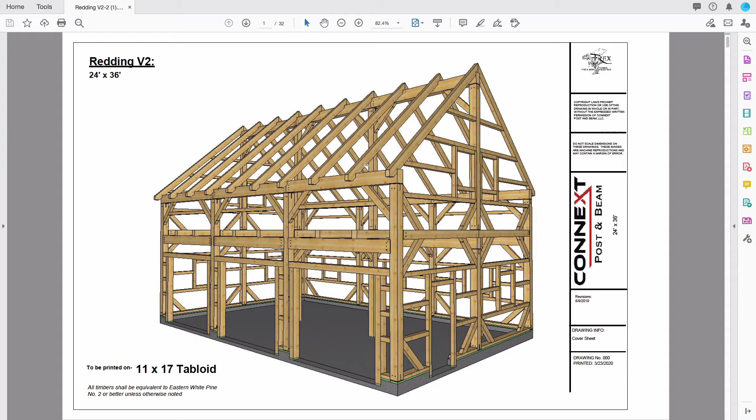Through my research, I found a company called Connex Post and Beam, owned by a guy named Pete, that I'll show you his website here in just a couple of seconds. He does what is called the T-Rex system. Let me see if I can shrink this down real quickly.

So he has designed this T-Rex system, and what you get are these T-plates. They're made out of aluminum, anodized black, and you attach these to the beams, and that takes the place of cutting the mortises and tenons. When I found this, I knew immediately that, one, I could do this, and two, this was the right way for me to go. It's going to give me the look that I want without possibly the heartache and frustration of a rookie trying to do a mortise and tenon structure and never get it done, and then just have a bunch of firewood laying on my property.

So that's essentially the way it works, right? Here are obviously some angle rafter things, some T-plates here, and so that's it. So I went ahead and I purchased this plan.

One other thing before we get into this too much, I've watched a ton of these videos over the years of people building barns, timber frame homes, post and beam, and very few times do they talk about costs. So I want to make sure that that is a part of this channel, what it costs to do this.

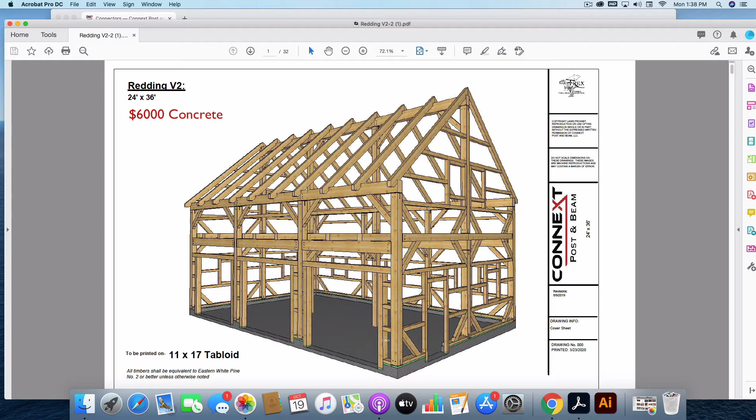Then the frame itself, which I have to cut, it's just the lumber, I purchased out of Tennessee, including the delivery to me, is a little over $10,000, and $1,700 of that is delivery, bringing a big rig to where I live at and dropping it off. From there, I'm going to have to rent something to actually pull the timbers off of the truck, because they said the packages can weigh up to 5,000 pounds, as they're strapped together. So that's that. And that does not include things like the doors, the windows, the flooring, the roof, none of that.

So that's all the connectors, the tools, that sort of thing. Then I need a $500 Stihl electric chainsaw. Yeah, I have a standard Husqvarna chainsaw, but to sit there and crank that thing over every time I needed to make a chainsaw cut is going to be a pain in the butt. So I'm just going to buy an electric chainsaw. I have a generator on the property, so that's where we're at.

So let me walk you through these plans real quick. They're very detailed. You get 32 pages of plans. I actually talked with Pete, this gentleman right here.

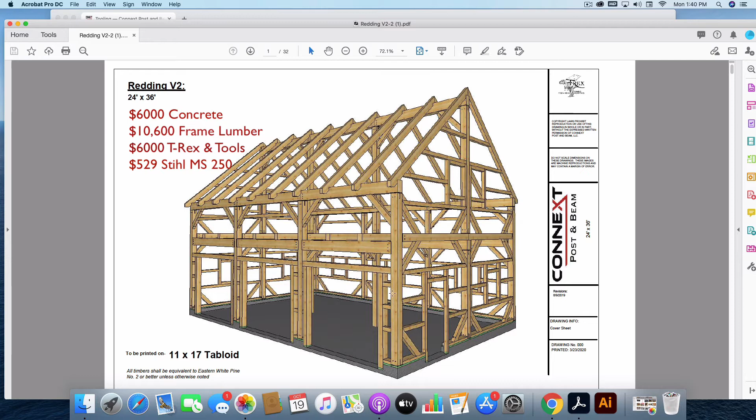The barn I was looking at was 28 by 28. This turns out to be 24 by 36. So this will give me the ability to put my boat in one side, plus a lot of area on the second floor for storage and what have you. So that's where we're at.

Again, these plans are very, very detailed, and I'm just going to scroll all the way through. That's what it looks like. And then right here, you get cut lists of all of the beams.

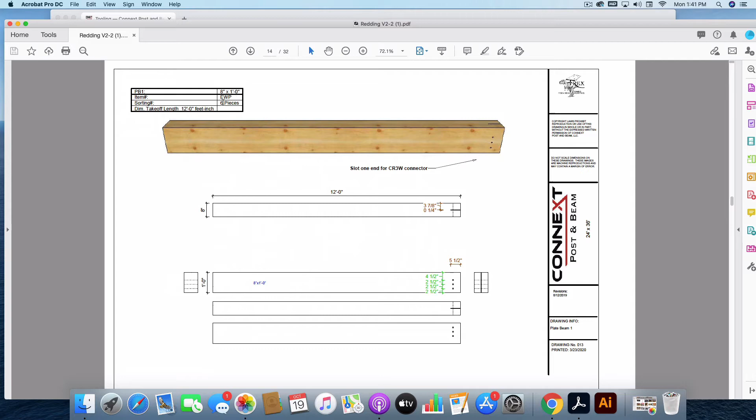So for example, I'll take this one. This is an 8 by 12, and I need 6 pieces with these identical cuts. And if I go to, let's say, the rafter here, same thing. So these are 4 by 8s. I need 20 of them. And here are all of the cuts.

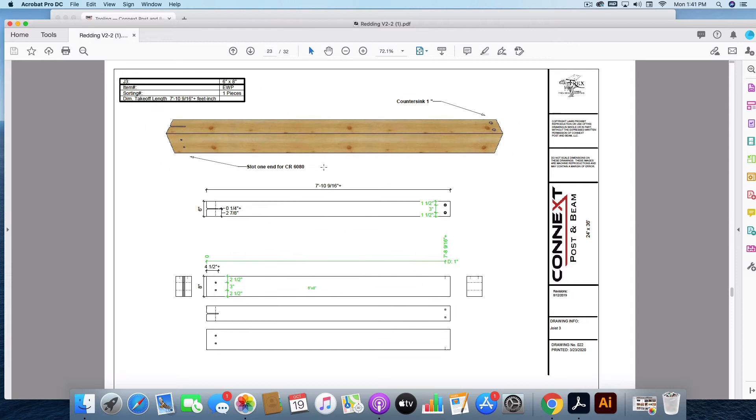2 pieces of 8 by 12. So most of the barn, everything that I'm pulling up, it seems to be 8 by 12, but most of the barn is 6 by 8 and 8 by 8. Here are the posts, these are 8 by 8s, 4 pieces, 13 feet 10, 15 sixteenths. Shows you where to notch them, everything.

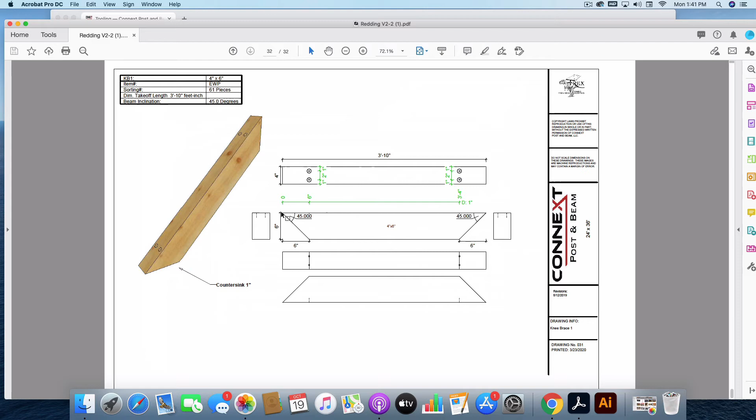So very easy to follow instructions. What Pete told me is don't assemble this like it is a timber frame, because it's not a timber frame, it's a post and beam. So make all your cuts and then start putting in the posts one at a time.

And he said a crew that knows what they're doing will generally cut one of these barns in 3 days, and a crew that knows what they're doing will typically assemble one of these barns, just the frame, not the siding, not the roof, just the frame, in 3 days. That's really where they're at, obviously barring weather conditions and that sort of thing.

When asked how long it might take me, he said 7 to 10 days. I'm planning on months, I'm going to go as fast as I can. And the nice thing about my life is that I'm fairly flexible. I work from home, so if I want to wake up at 4 o'clock in the morning and put in a full day's work by noon, then take off at 12:30, I can do that. I have that flexibility, which a lot of people don't have, so I'm blessed to have that. But that is the plan.

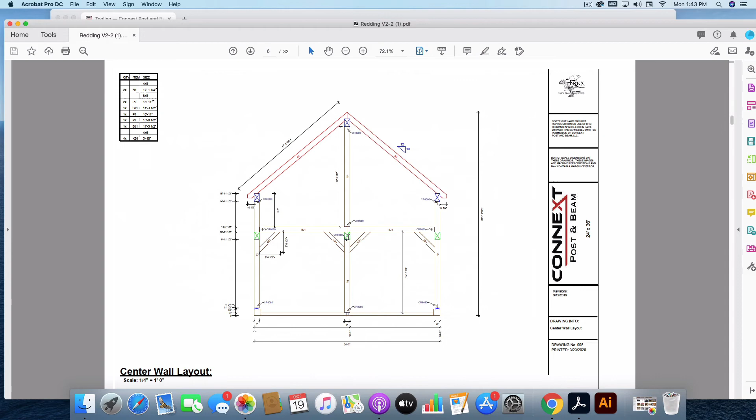This building process is going to start relatively quickly. It's going to be a long, cold winter. And again, I do not have any real woodworking experience. I did, however, as kind of a practice, build a pavilion over the summer on the property, and that went well.

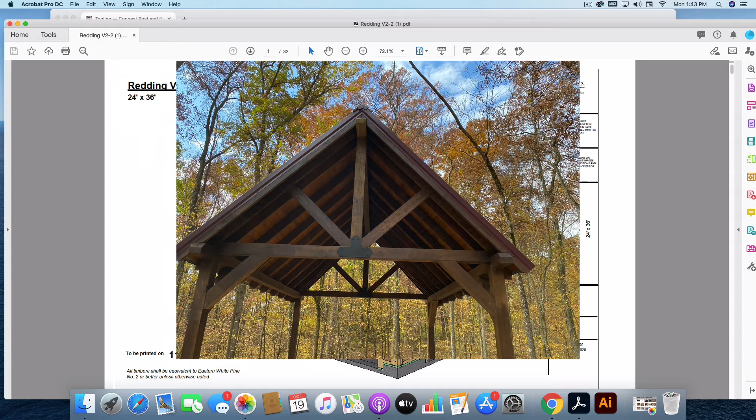I'm happy with how it turned out, so that gave me the confidence to build this. The pavilion is 12 by 16. That gave me the confidence to go ahead and say, I think that I can do this.

I'm just going to take my time, read the instructions over and over. You know what they say, measure twice, cut once. I'm probably going to measure 5 times, because in my area we have readily available southern yellow pine. We don't have readily available eastern white pine, or at least I couldn't find it, so I ordered this stuff from Tennessee, and I ordered a little bit over just in case I screwed up a piece of wood here or there.

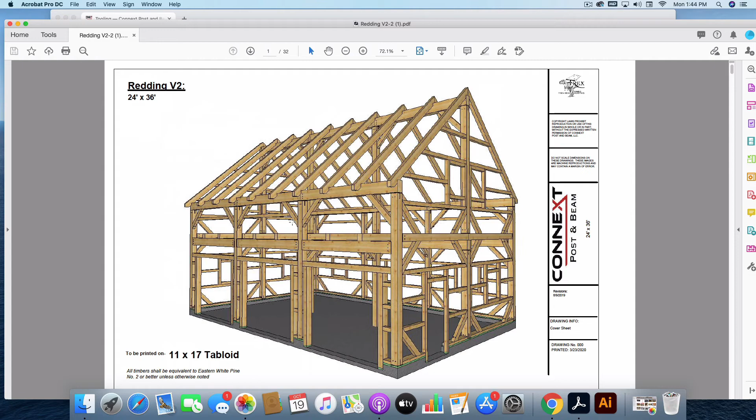However, this is not something that I can afford to screw up the cuts on, so I have to be careful. I have to go slow, so it's going to take me a while. But hopefully the end result is a barn that I am happy with. Let me go ahead and show you some pictures of what we've got going on here and how the end of it will look.

And the one change that we did make up here on the second floor is that we are going to do a dormer, not off the front of the barn, but off of the back of the barn, to give a little bit more space up there, because obviously the pitch of the roof is a 10-12 pitch. So to kind of bump that out a little bit gives a little more space. But I do like this look on the front, so we're going to put that dormer on the back.

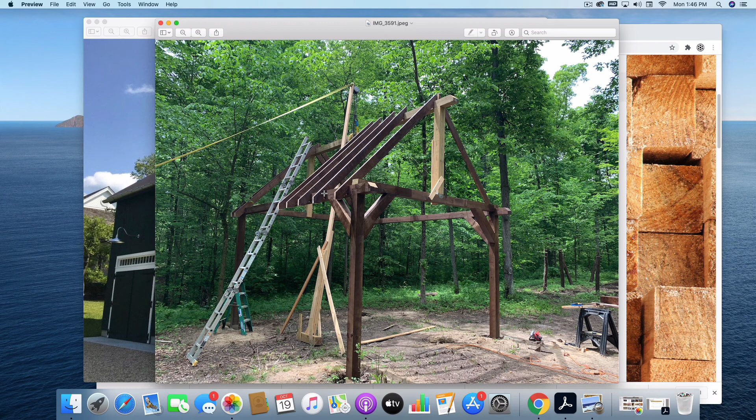And then here's a picture of me. I built this all by myself. I did have my sons and a friend of mine help me put these posts in the ground initially. However, after that, I built every inch of that pavilion myself. And like I said, I'm happy with the way that it turned out.

This is a little gantry crane that I made to lift up this beam. This beam here is a 20-foot long 6x6. I don't know exactly how much it weighs, but I would imagine it weighs probably 250 pounds. It was not something that I was going to be able to walk up there. Not only that, this is a 12-12 pitch, and from here to here it's right about 5.5, 6 feet. So I could not do that.

So I built this gantry, which I was really happy with, because I had seen videos of these and how they work, and it worked fantastic. This line here is strapped to a tree, and there's another line right here that is strapped to this tree. So this end is pulling this way, this end is pulling this way, and as you can see right here, it's just a chain hoist like you would use to lift something in your garage. And it made it so easy, it just lifted right up, no problems.

So I'm planning on doing a lot of this type of stuff, because I don't have a lot of heavy equipment. In fact, I don't have any heavy equipment. I do have an old tractor, but I'm going to have to do a lot of it this way on my own, with these types of gantry cranes and that sort of thing. So that's where we're at.